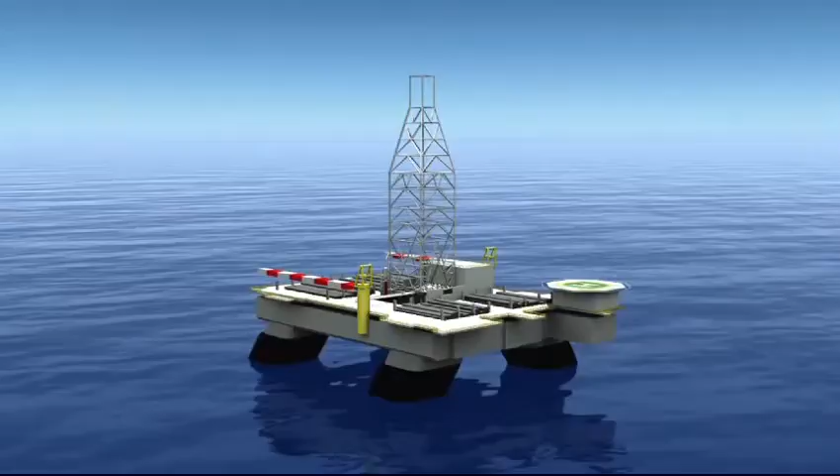This video summarizes the findings and analysis of this investigation team. As I review these, it's important to keep in mind the goals of the investigation. Our team was assembled immediately after April 20th in order to identify the critical factors underlying the accident.

Our mandate was to determine what happened so that BP could take whatever steps necessary to prevent a similar accident from ever happening again. Our purpose was not to apportion blame or liability, but rather to learn, recommend areas for improvement, and share our lessons with others.

While I believe we had sufficient evidence to reach the findings summarized here, our work was limited by a lack of direct access to some witnesses and to certain physical evidence. I will be presenting our findings factually, but it's important to note that our purpose was not to create a record that would serve as the definitive or final word on what happened.

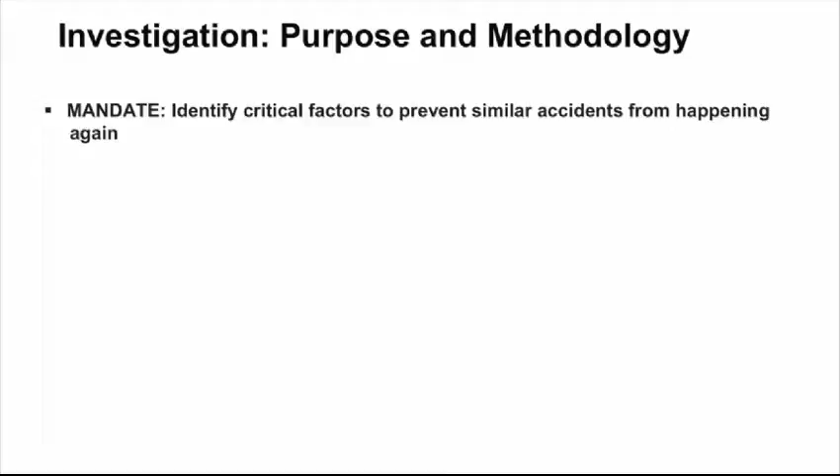The investigation team consisted of more than 50 internal and external engineering specialists with expertise in various aspects of deepwater drilling and exploration. We worked over a 4-month period examining all available evidence.

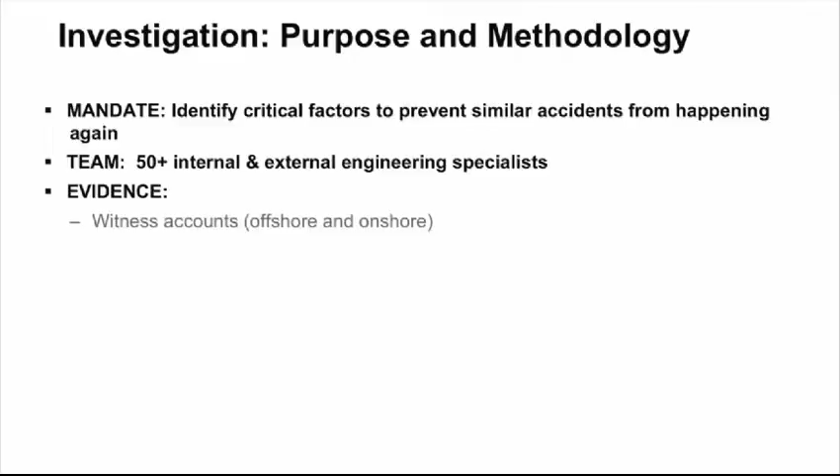This visual portrayal of our key findings is best viewed in the context of the report, which describes more fully the basis for findings. The findings were based on witness accounts, analysis and modeling, as well as engineering drawings, real-time data from the Deepwater Horizon, physical evidence, and testimony gathered from governmental inquiries.

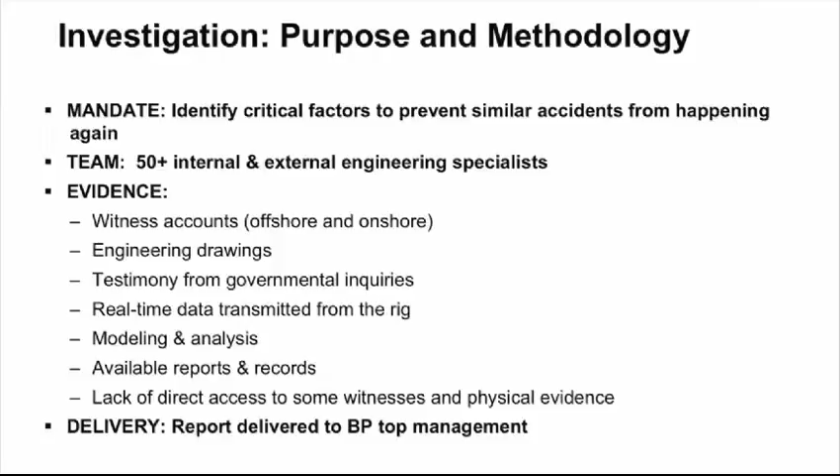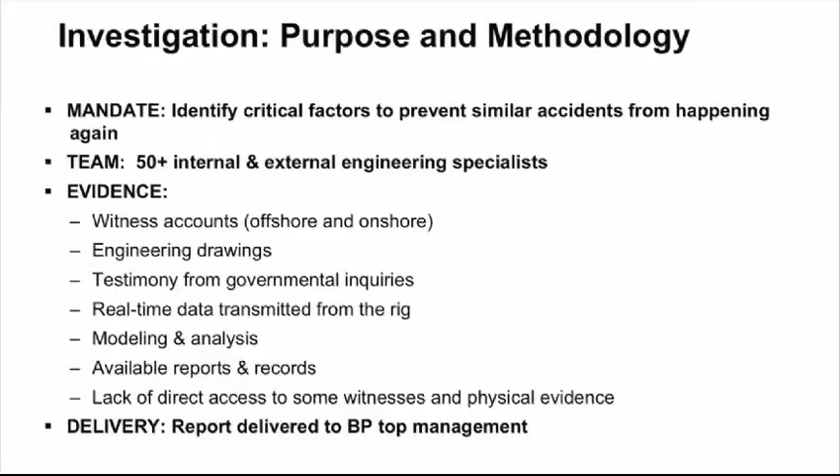The team's report was delivered to the board and BP's top management. They are sharing it publicly in order to keep the public informed, to assist with the government's various investigations, and to ensure that BP and the industry can learn from the accident and take appropriate actions going forward.

To determine what led to the tragedy, it's important to first understand the events that occurred aboard the Deepwater Horizon leading up to the accident. This short animation depicts the best understanding the team was able to reach about the chronology of key events as we understand them today. This is an animated reconstruction of the tragic accident aboard the Deepwater Horizon on April 20th, 2010. This narrative has been developed to illustrate what we determined were the key events related to the accident. The animation is representative and for illustrative purposes only, and has not been drawn to scale.

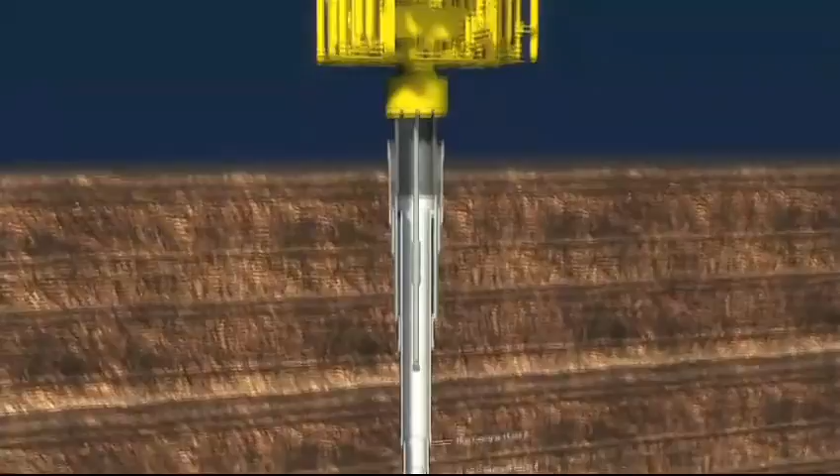The Deepwater Horizon was a dynamically positioned drilling vessel whose construction was finished in 2001. It was designed to drill in water depths up to 10,000 feet. The vessel arrived on the Macondo location on January 31st, 2010, to finish the exploratory well that had been started earlier by its sister vessel.

The riser and the BOP were installed successfully. 4 casing strings were installed over a 2.5-month period. Our narrative begins on April 9th, 2010. The final hole section of the well was drilled to a total depth of 18,360 feet. The long string production casing was installed.

During the afternoon of April 19th, the cement job started. Cement is used as a barrier to seal the wellbore from the reservoir sand. Nitrified foam cement was pumped into the annulus and non-foam cement was pumped into the shoe track. At this point, the pump pressure was bled off and it appeared that the check valves in the float collar were holding. It's now the morning of April 20th.

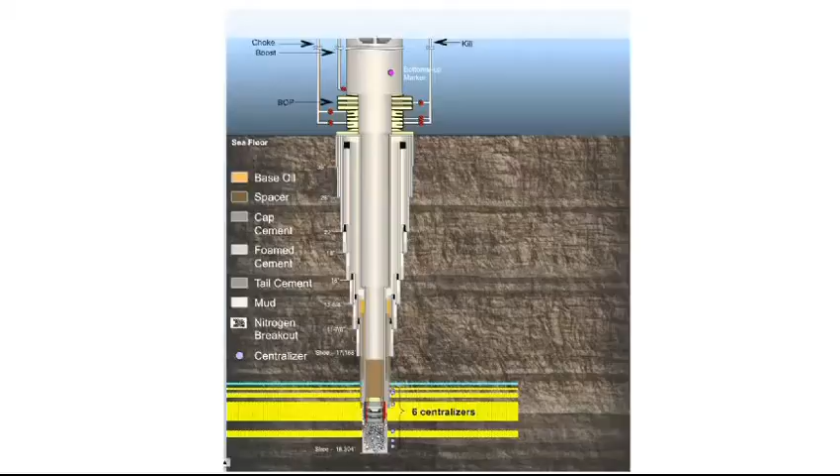The wellhead seal assembly was installed and tested. A positive pressure test, the first integrity test of the well, was conducted by closing the blind shear rams and applying 2,700 psi of pressure. The test confirmed integrity of the blind shear rams, the seal assembly, casing, and top wiper plug. The shoe track, which also plays a key role in isolating hydrocarbons, was not tested because of the presence of the top wiper plug. It's now early afternoon.

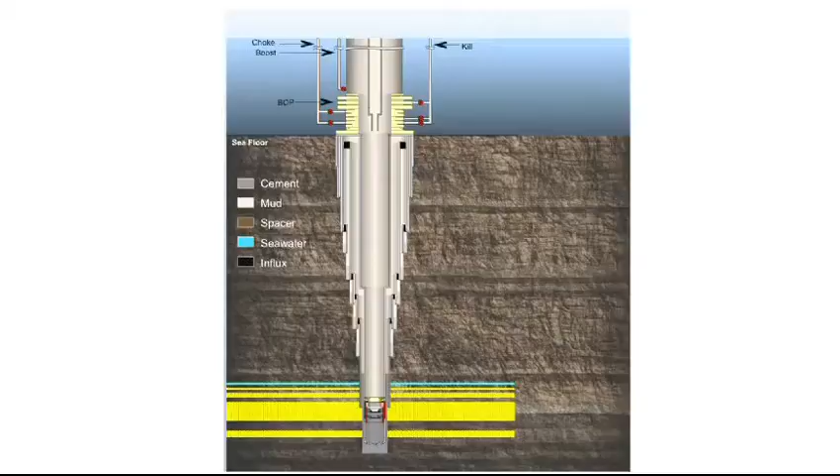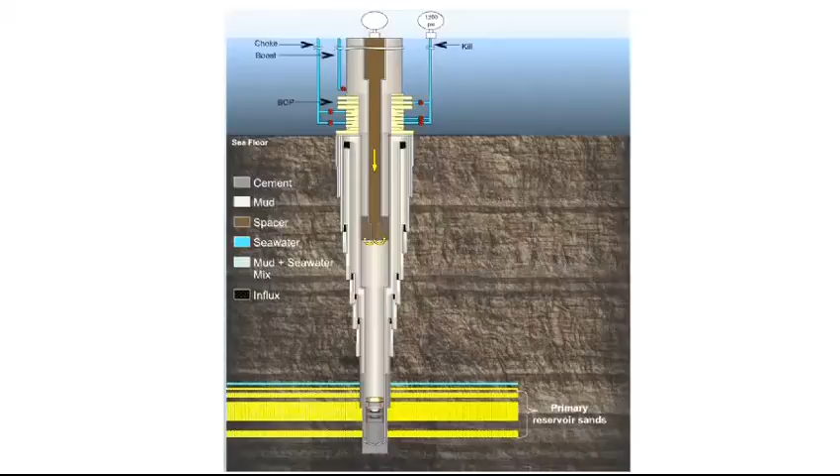The drill pipe was run to 8,367 feet in preparation for the negative test, which was the second test of the well's integrity. The test's purpose was to place the well in a controlled, underbalanced state to test all mechanical barriers. It was conducted by displacing some of the mud in the well with a spacer followed by seawater. After displacement, the upper annular preventer was closed. An attempt to bleed the system down to 0 psi was made, but fluid in the riser was leaking past the annular preventer.

It's now 1708. The hydraulic closing pressure for the annular preventer was increased to 1900 psi in order to create a tighter seal against the drill pipe. The riser was filled with an estimated 50 barrels of mud to replace the volume that had leaked past the annular. At 1727, the drill pipe valve was opened and the pressure reduced to 0 by bleeding off 15 to 23 barrels of seawater.

It's now 1735. The well site leader advised the rig crew that the negative test procedure needed to be conducted on the kill line to meet permit requirements. The drill pipe valve was closed and the testing reconfigured for flow to be monitored on the kill line. At 1752, the kill line valve was opened. Based on eyewitness accounts, somewhere between 3 and 15 barrels of seawater were bled off. The kill line valve was closed and the drill pipe pressure gradually increased.

It's now 1842. Seawater was pumped into the kill line to confirm that it was full. The kill line was routed to the mini trip tank, and less than 1 barrel was bled from the kill line. The flow stopped. The kill line was monitored for 30 minutes and showed no flow, but the drill pipe pressure remained at 1400 psi. A discussion about the source of the 1400 psi took place. It was explained as a phenomenon called the bladder effect. The test was deemed successful.

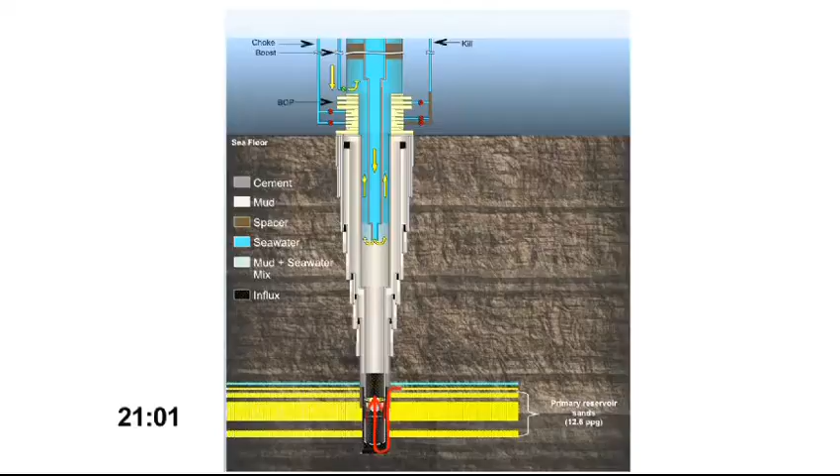It's now 2101. The crew was emptying the trip tank, which likely masked any flow indications on the flow meter. At this point, with constant pump rate, pressure should have declined as the heavier mud was being replaced with lighter seawater. Instead, drill pipe pressure increased by 100 psi, indicating a problem with the well. Analysis of real-time data shows that a 39-barrel gain was taken by 2108.

It was then time for the sheen test on the spacer, which is done in order to check that there is no free oil in the fluid that will be discharged to the sea. The pumps were shut down when the spacer reached the surface. A sheen test was performed, and the spacer was determined to be suitable for discharging overboard. The drill pipe pressure increased by 246 psi in 5.5 minutes while the pumps were off. The fluid returned from the riser was routed to the overboard dump line. During this period, our modeling suggests that the well was flowing at an estimated 9 barrels per minute.

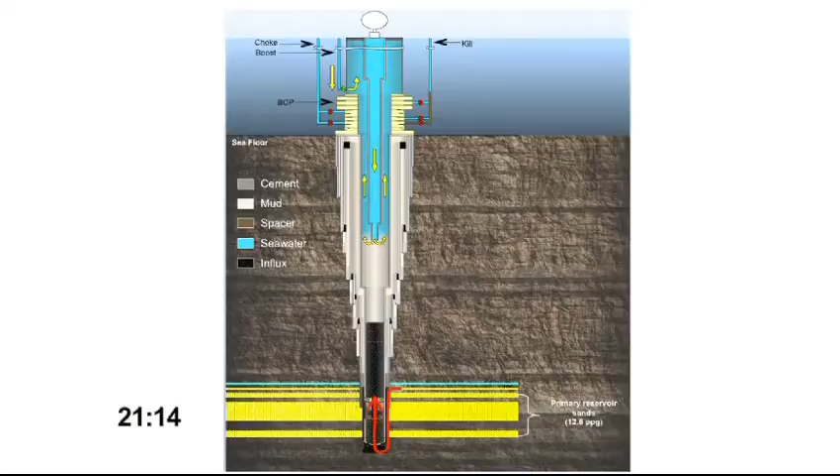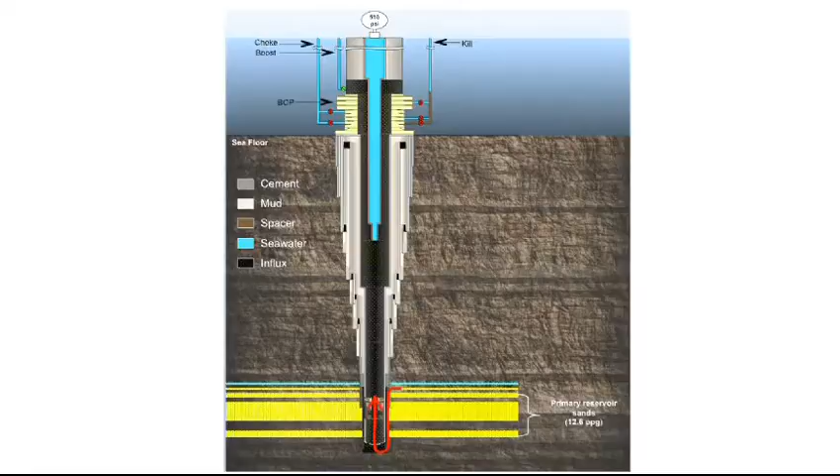Displacement of the mud with seawater resumed at 2114. It's now 2131. All mud pumps were shut down. An estimated 300-barrel gain has been taken. Over the next 5 minutes, the drill pipe pressure increased by 556 psi. Rig personnel discussed the differential pressure on the drill pipe. In the next 2 minutes, it appears an attempt was made to bleed the drill pipe, possibly to investigate the differential pressure.

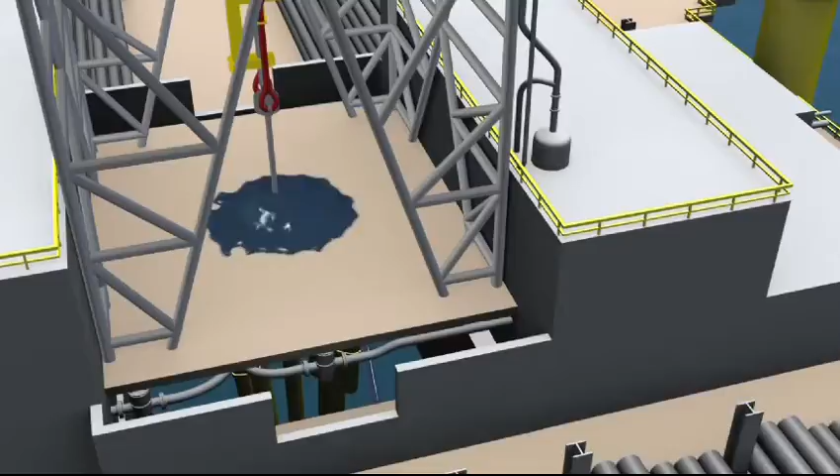Over the next 20 minutes, a series of critical well control events occurred, ending in the order to abandon ship. It's now 2140. Mud overflowed onto the rig floor. A minute later, the mud shot up through the derrick.

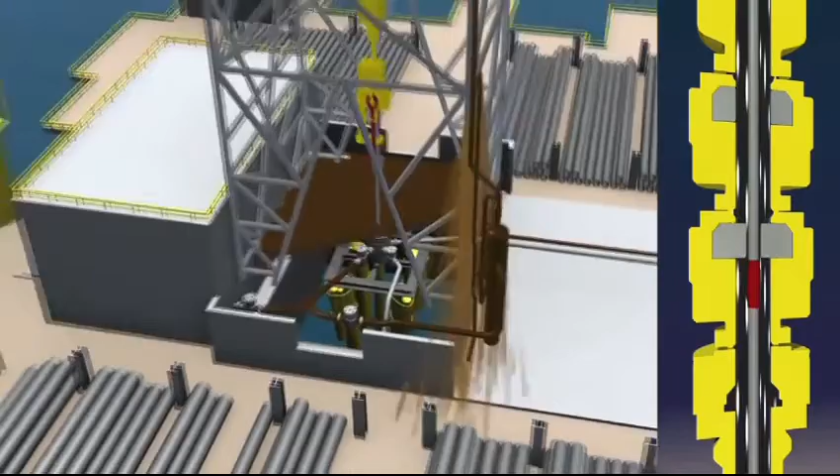The diverter was closed and flow was diverted to the mud gas separator. At about the same time, the rig crew appeared to close an annular preventer and drill pipe pressure increased steadily from 338 psi to 1200 psi over a 5-minute period. Mud and hydrocarbons discharged onto the rig and overboard. Activation of the annular preventer appears to have failed to seal the annulus.

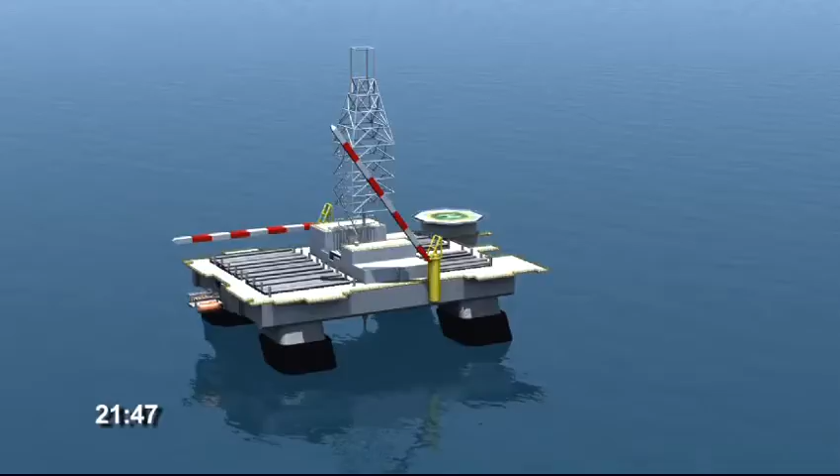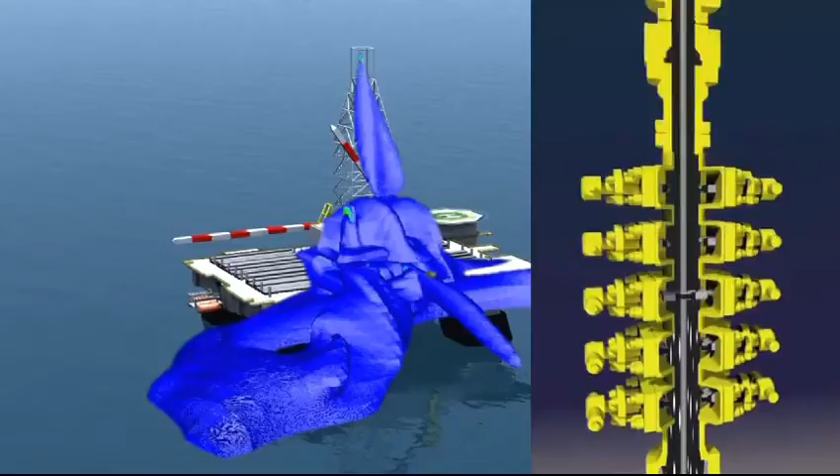It's now 21:47. The first gas alarm sounded. A cloud of gas spread, setting off other gas alarms. There was a roaring noise and the vessel vibrated. The drill pipe pressure rapidly increased to 5,730 psi, which is thought to be the result of the BOP sealing around the drill pipe, likely after activation of the variable bore rams or the annular preventer fully sealing.

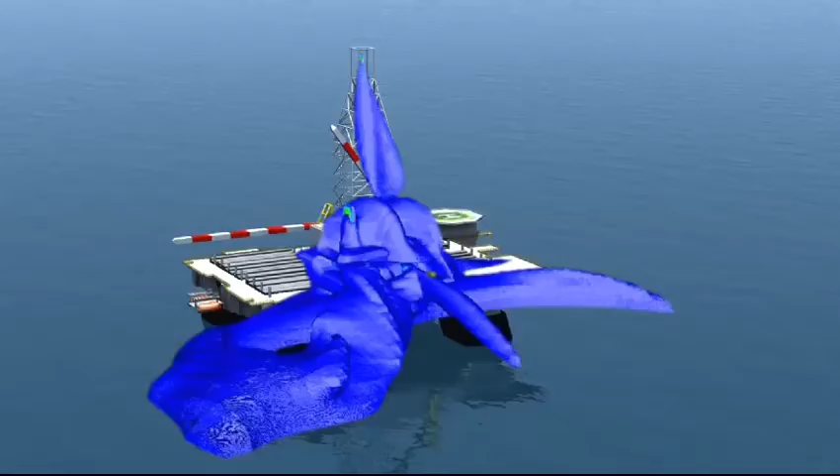1 minute later, the combustible gas cloud reached the aft starboard quadrant of the main deck and probably entered the air intakes for the engine room. Gas also dispersed under the deck and into the engine room enclosures. The main power generation engines went into overspeed.

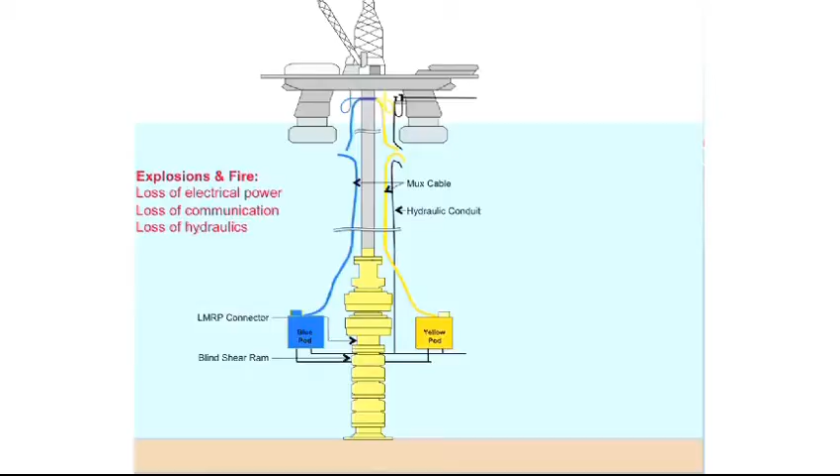Within another minute, electrical power was lost and there were 2 explosions. The first occurred at about the same time as the power loss. The second occurred an estimated 10 seconds later. The second explosion appears to have taken place under the main deck in the aft starboard quadrant of the rig.

The associated blast pressure wave traveled forward and caused extensive damage to the starboard side, potentially damaging the MUX cables, which allow the vessel to communicate with the BOP. The hydraulic line which powers the BOP may also have been damaged.

The fire and explosions may also have caused damage to the surface drill pipe equipment, resulting in hydrocarbons flowing to the surface through the drill pipe. The valve on the drill pipe was left open, exposing surface components to high shut-in pressure.

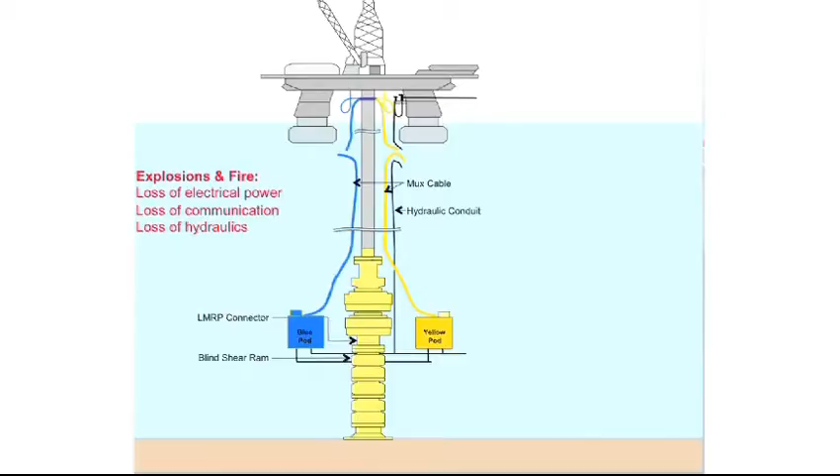While the BOP had closed around the drill pipe, it did not seal the well, and the subsequent loss of power may have resulted in the rig drifting off station. The drifting rig may have broken the BOP seal around the drill pipe and allowed hydrocarbons to continue to flow up the riser. One or a combination of these events ultimately allowed the fire to be continually fed.

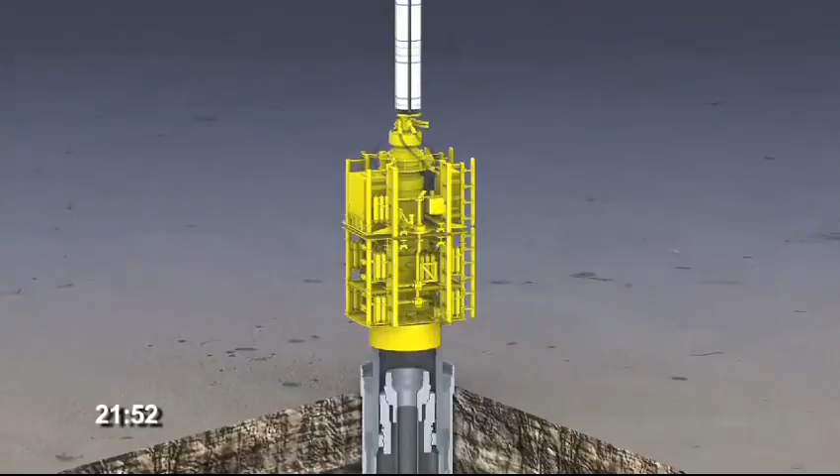It's now 21:52. Over the next 5 minutes, personnel attempted to shut in the well and disconnect the lower marine riser package from the BOP stack. The emergency disconnect sequence for the BOP was activated from the bridge.

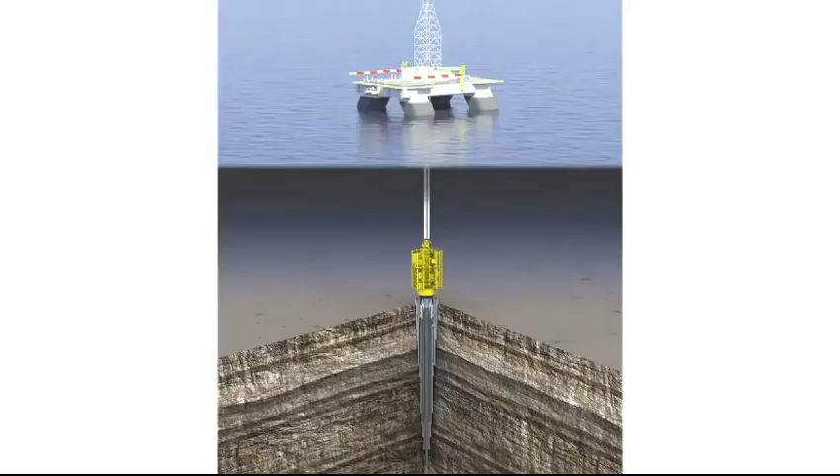While lights changed on the control panel, no flow was observed on the flow meters. It appears that the emergency disconnect system did not function. The lower marine riser package failed to unlatch from the BOP, and the BOP did not seal the well. With the Deepwater Horizon unable to disconnect from the well, the order to abandon ship was given at 2200 hours.

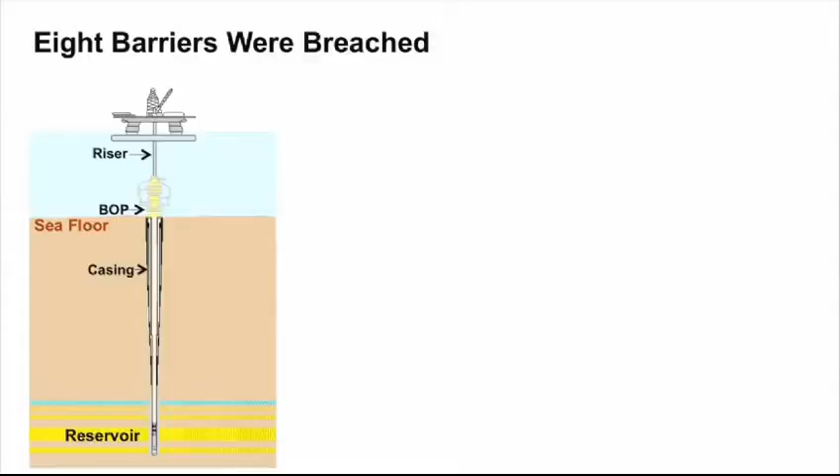This animated chronology has shown what we believe happened. Now we'll turn to an analysis identifying the contributing factors. As you'll see, we concluded that there was no single action or inaction that caused the accident. Instead, we found that there were 8 interrelated and contributing factors that led to this tragedy.

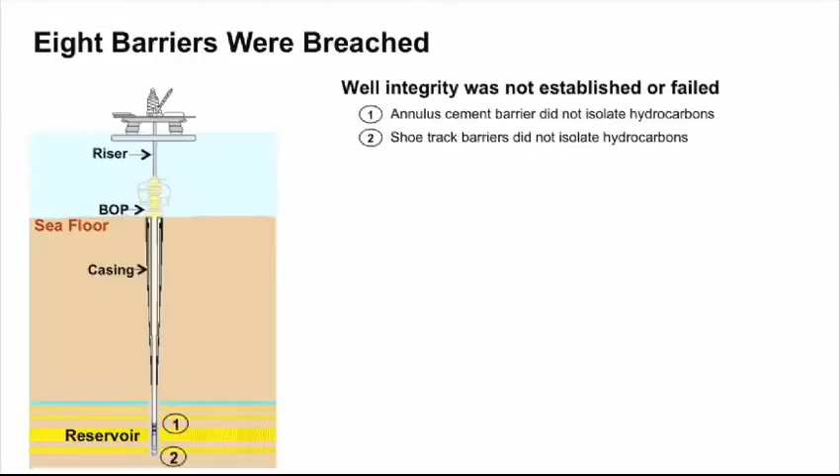The first 2 findings of the investigation relate to hydrocarbons entering the well. We believe that the evidence shows that both the annulus cement barrier and the shoe track barriers did not isolate the hydrocarbons, allowing them to flow up the wellbore.

The next 3 findings stem from evidence that the rig crew did not observe or recognize that hydrocarbons had entered the well before appropriate steps could be taken to contain them. The negative pressure test conducted in order to confirm well integrity was incorrectly accepted.

An influx of hydrocarbons was not recognized until it was too late to prevent the hydrocarbons from reaching the surface because they had already entered the riser. And well control response actions failed to seal and regain control of the well.

Our 6th and 7th findings relate to evidence that hydrocarbons came up through the riser and were dispersed across the vessel, creating the conditions for them to ignite.

We found that the well flow was diverted to the rig's mud gas separator, causing gas to be vented onto the vessel rather than being diverted overboard. Then, the vessel's fire and gas system did not prevent hydrocarbon ignition.

Our 8th and final finding was drawn from evidence relating to the blowout preventer. With the loss of well control and subsequent explosions and fires, the BOP did not seal the well. Each of these findings is explained in greater detail throughout the remainder of this presentation.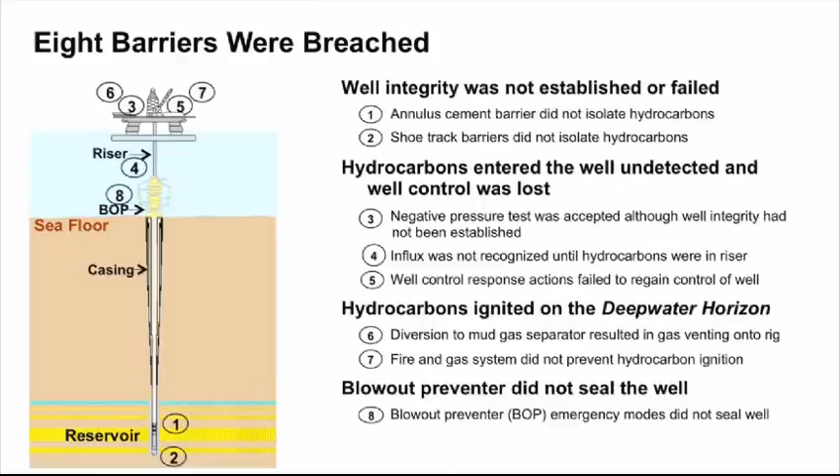Our first key finding relates to the cement job. BP relied on the expertise of Halliburton, the cementing services provider, to recommend a cement slurry appropriate for this well. The BP team was responsible for assuring Halliburton's work and accepting its proposal.

It was clear from the event that the cement did not isolate the hydrocarbons. The challenge facing the investigation team was to determine what happened without access to actual samples of the cement slurry used in the Macondo well. Therefore, we had an independent laboratory analyze the slurry design and also create and test samples based on that design.

Through our investigation of the cement job, we noted the following critical items. First, the high percentage of nitrogen in the foam cement made it difficult to create a stable foam slurry. Second, there were no fluid loss additives used in the entire cement slurry. Third, a relatively small amount of cement was pumped in relation to the displacement volume, increasing the likelihood of cement contamination. And fourth, Halliburton did not conduct comprehensive lab tests that could have identified potential problems with the cement.

The independent laboratory constructed representative cement samples based on the slurry design and demonstrated that cement stability could not be achieved. Therefore, we've concluded that the foam slurry likely experienced nitrogen breakout, resulting in nitrogen migration, slurry contamination, and incorrect cement density. Our investigation of the cement job also included an analysis of BP's decision to use 6 centralizers and a long string production casing in the well.

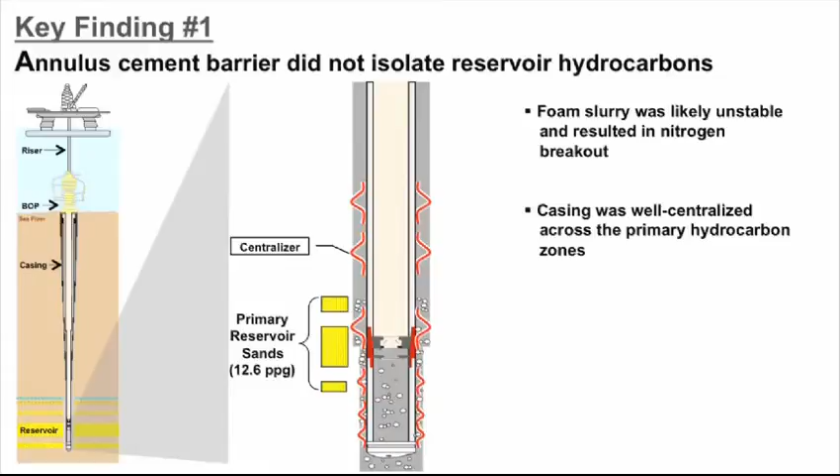The investigation team's next task was to determine the actual point of entry for hydrocarbons into the well. We examined and analyzed every plausible entry point. As a result, our second key finding is that the initial hydrocarbon entry occurred at the shoe track and that its mechanical barriers therefore did not isolate the hydrocarbons. Our conclusion is based in part on hydrostatic pressure calculations, well flow modeling, and an analysis of data recorded during the successful static kill of the Macondo well.

The shoe track has 2 types of mechanical barriers: the cement in the shoe track and the double check valves in the float collar. The investigation team believes that the shoe track cement failed to act as a barrier. The team has not established whether this failure was attributable to the design of the cement, contamination of the cement by mud in the wellbore, commingling of the cement with nitrogen due to nitrogen breakout from the foam cement, swapping of the shoe track cement with the mud in the bottom of the well, or some combination of these factors.

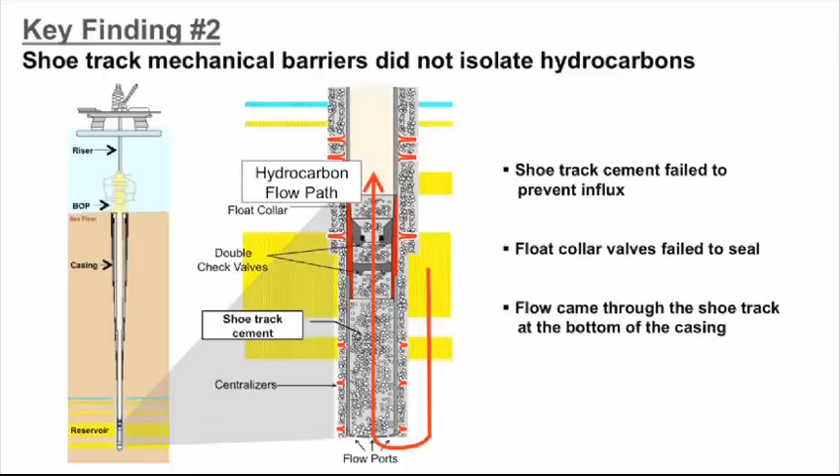Hydrocarbons were able to bypass the float collar check valves because they were damaged, they never properly converted, or they simply failed to seal. The evidence shows that the flow came up through the shoe track at the bottom of the production casing. Therefore, the decision to use 6 centralizers likely did not contribute to the outcome.

The third key finding is that the negative pressure test was accepted, even though well integrity had not been established. The negative test was conducted to confirm the integrity of the annulus cement, shoe track, casing, and wellhead seal assembly. Looking back, the investigation team believes there were several issues associated with this negative test.

First, at the start of the test, the annular preventer allowed approximately 50 barrels of spacer to pass into the BOP. This may have inhibited the pressure readings on the kill line. Second, the bleed-off volumes we examined were in excess of what should have been expected, indicating communication with the reservoir through failed barriers.

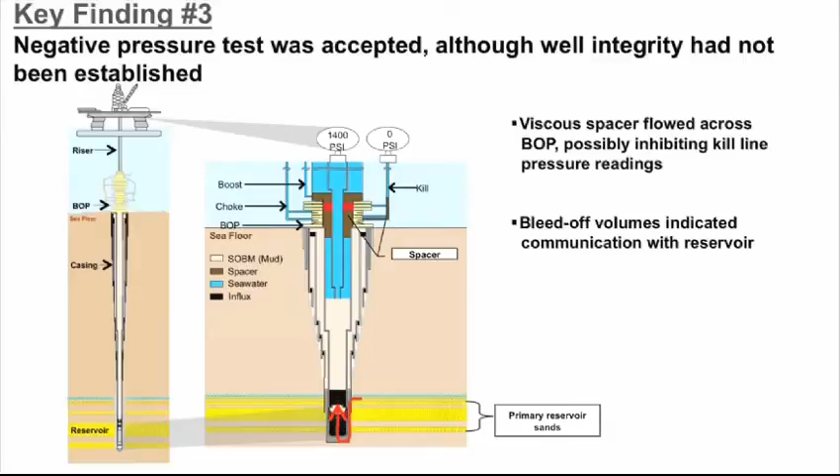And third, rig personnel found that drill pipe pressure had increased to 1,400 psi with no flow on the kill line. The investigation team believes this reading should have resulted in further inquiry into the well's integrity. Instead, the abnormal pressure was attributed to a phenomenon called the bladder effect.

Ultimately, the negative test was incorrectly deemed a success by BP and Transocean rig personnel. A more detailed procedure would have helped BP and Transocean personnel to implement and interpret the negative test.

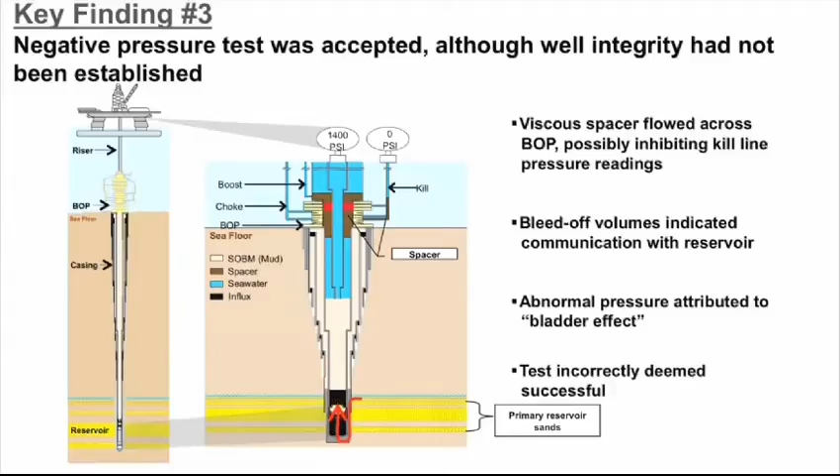The investigation's fourth key finding is that the influx of hydrocarbons into the well was not recognized until it had entered the riser. Well control principles rely on early influx detection and effective response. The investigation team examined real-time data from the rig, conducted dynamic flow modeling, and reviewed witness accounts in order to reconstruct the key indications of flow that we believe were not observed or recognized. It appears that there were a number of indicators of hydrocarbon influx that went unobserved or unrecognized.

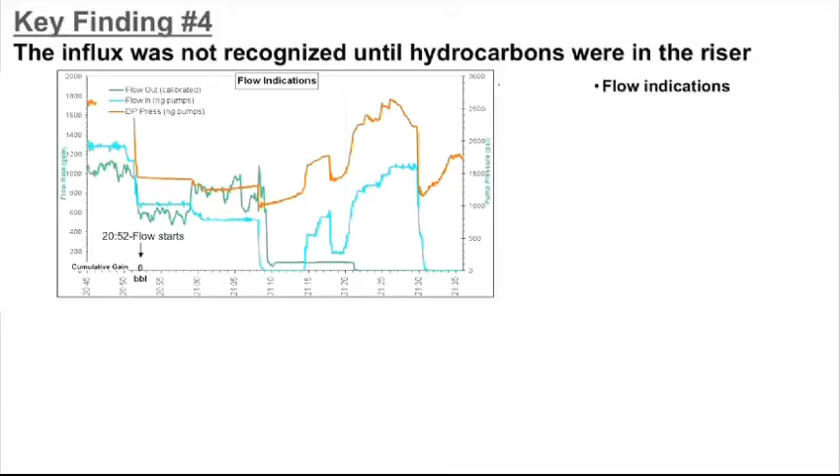First, from 2058 to 2108, the drill pipe pressure should have decreased. Instead, drill pipe pressure increased by 100 psi at a constant pump rate starting at 2101. By 2108, a 39-barrel gain had been taken.

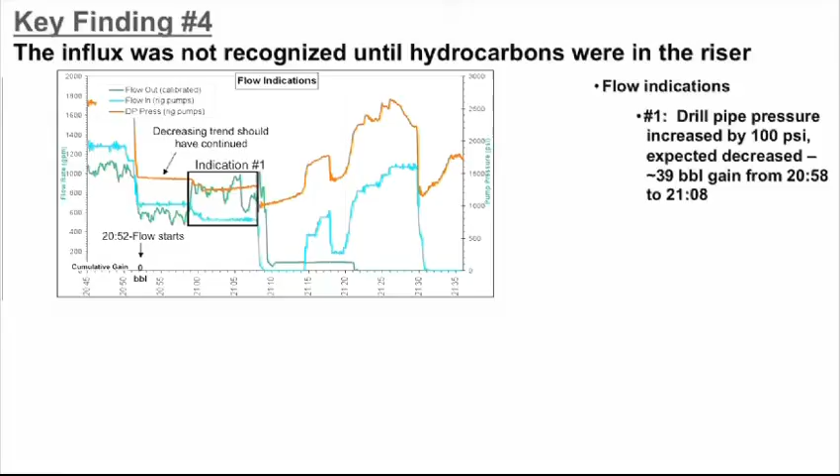Second, from 2108 to 2114, the drill pipe pressure increased by 246 psi with the pumps off. Pressure should not have changed during this period.

And third, by 2131, an estimated 300-barrel gain had been taken. Over the next 5 minutes, the drill pipe pressure increased by 556 psi, again with the pumps off. These indicators should have been observable, but it appears the first well control actions were not taken until about 2141, by which time an estimated 1,000-barrel gain had been taken.

The investigation team has not reached a conclusion as to why these indicators were not observed or recognized. We note, however, that simultaneous operations were occurring on board the vessel at this time, including mud pit cleaning and mud pit transfers, which may have masked the indications of a hydrocarbon influx.

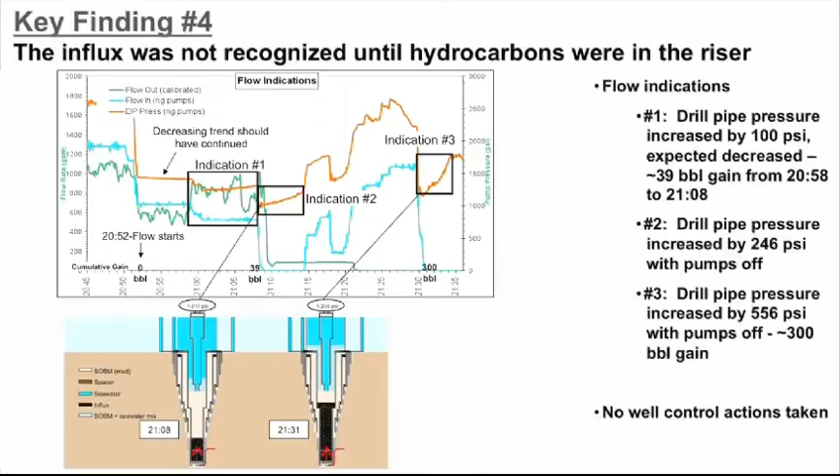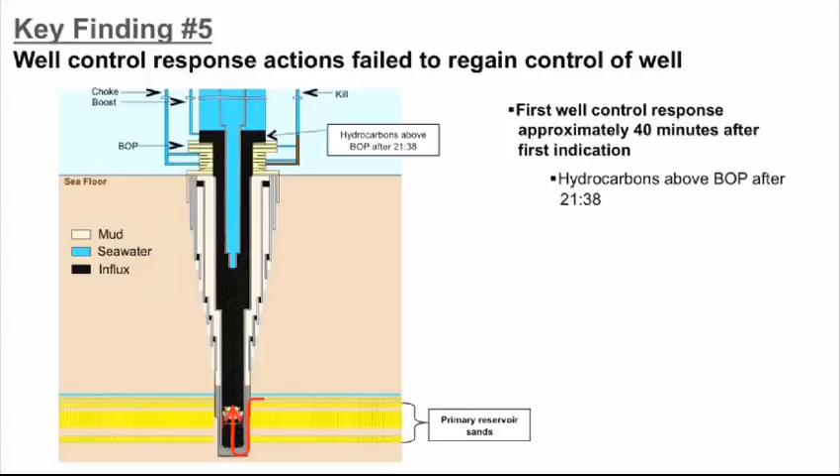The fifth key finding is that well control response actions did not regain control of the well. Upon recognizing an influx, the well must be shut in, and if necessary, hydrocarbons diverted safely away from the vessel. The investigation team believes that the response on April 20th was not typical of a rig crew that was aware a significant well control event was occurring. For example, in retrospect, there was about a 40-minute gap between the first indication of hydrocarbon influx and the first well control response.

Roughly 8 minutes later, the first explosion occurred. When action was taken, the diverter was closed and the flow was routed to the mud gas separator. Also, at that point in time, it appears that an annular preventer was activated, but apparently did not immediately seal. The BOP sealed about 6 minutes later. The investigation team believes that the time for effective emergency response was significantly shortened because initial indications that hydrocarbon had entered the well went unobserved or unrecognized.

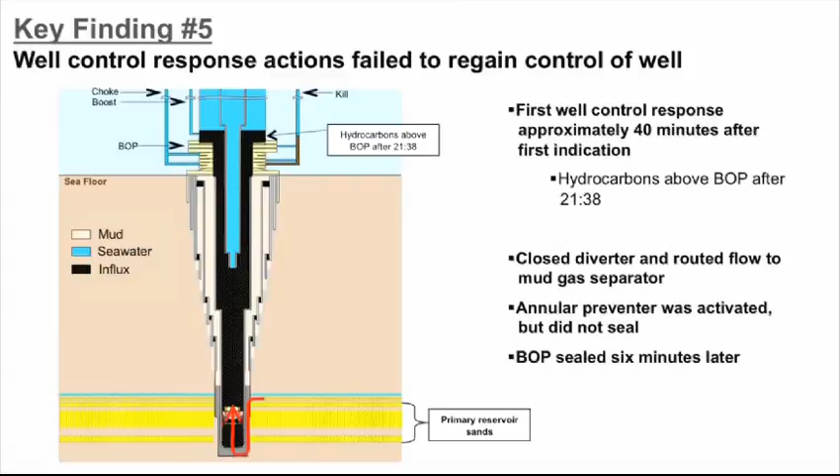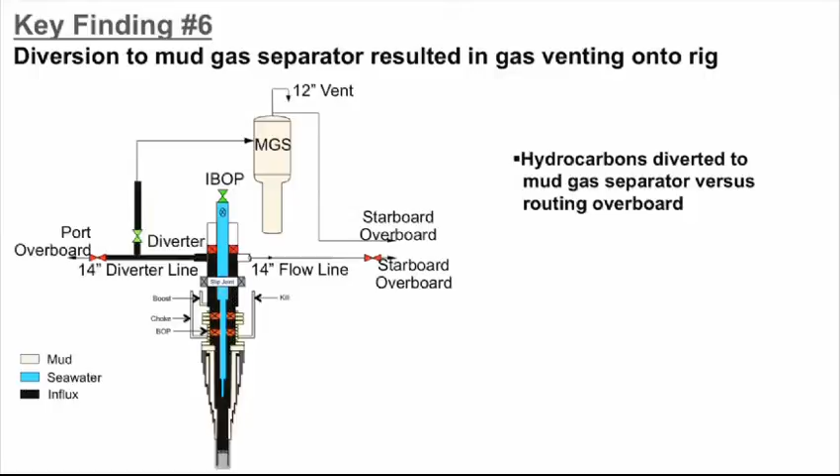The sixth key finding is that the diversion of hydrocarbons to the mud gas separator resulted in gas venting onto the rig. In a well control event, the riser diverter can be closed and the fluids directed to either the overboard diverter lines or the mud gas separator. Based on testimony and interviews and an analysis of photographs and well flow data, we believe the flow was diverted to the mud gas separator. The mud gas separator is designed to remove small amounts of entrained gas, but not the significant volumes experienced here. Large volumes would generally be expected to be sent overboard via the 14-inch diverter line. As gas dispersed across the vessel, potential ignition sources were enveloped in a flammable vapor cloud.

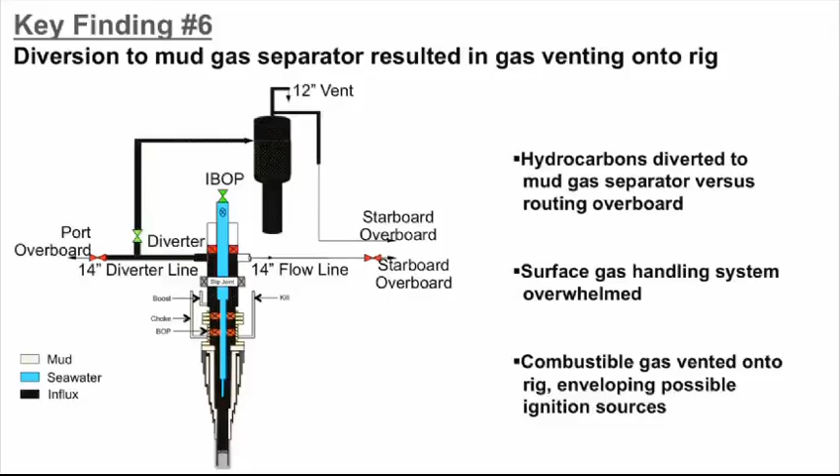The seventh key finding is that the fire and gas system on the Deepwater Horizon did not prevent hydrocarbon ignition. Gas dispersion modeling conducted by the investigation team shows that rapid spread of gas across the vessel covered the main deck and moon pool areas, overwhelming the secondary protective devices. The investigation team believes that the gas likely entered the engine rooms through the main deck air intakes, resulting in engines going into overspeed. These engines were one potential source of ignition.

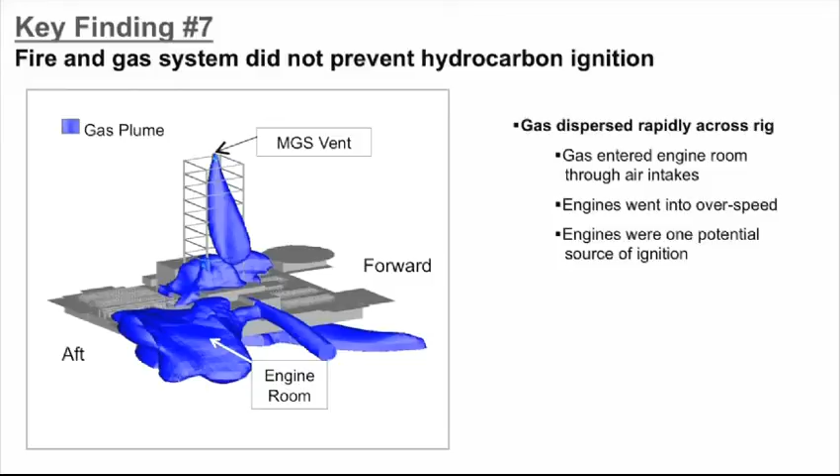The eighth and final key finding is that the blowout preventer did not seal the well. The investigation focused on the BOP's emergency systems and why they failed to seal the well after the initial explosion. The investigation team identified issues that we believe interfered with the operation of the BOP. First, the initial explosions and fire damaged the control cables, called MUX cables, and the hydraulic lines. The MUX cables are critical to BOP operation because they provide electronic communication and electrical power to the BOP control pods. This is likely why the emergency disconnect system failed to activate the blind shear ram when it was triggered by personnel on the bridge of the Deepwater Horizon.

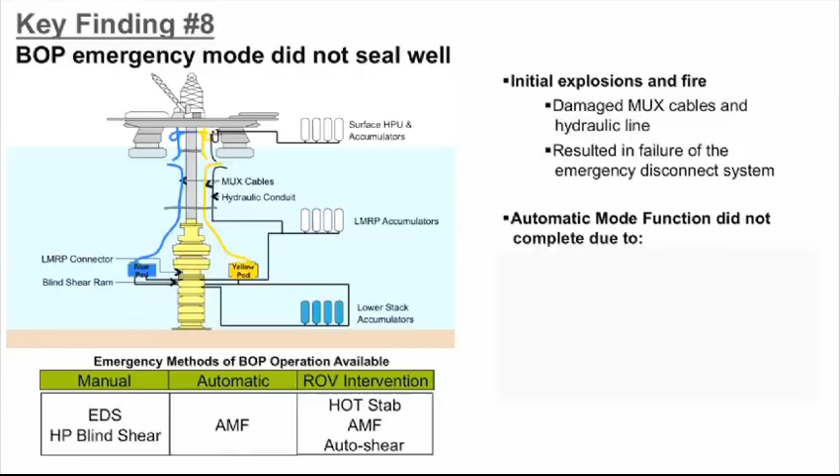Second, we believe, based on testing done at the direction of Transocean, after both control pods had been retrieved, that the automatic mode function, or AMF sequence, did not complete. The AMF should have activated automatically, without crew intervention, when the MUX cables and hydraulic line were damaged. At least one operational control pod was required to activate the AMF. However, based on testing, there was a defective solenoid valve in one control pod and insufficient charge on the batteries in the other control pod.

We believe that the ROV intervention to simulate auto shear conditions likely activated the blind shear rams, but they failed to seal the well and hydrocarbons continued to flow. The investigation team has not determined the reasons for the failure of the blind shear rams to seal. Presence of non-shearable pipe across the blind shear ram, insufficient hydraulic power subsea, and prevailing flow conditions are among the potential causes of failure. The investigation team also found indications of potential weaknesses in the testing regime and maintenance management system for the BOP. The BOP is a complex device, and more may be known when it is fully examined.

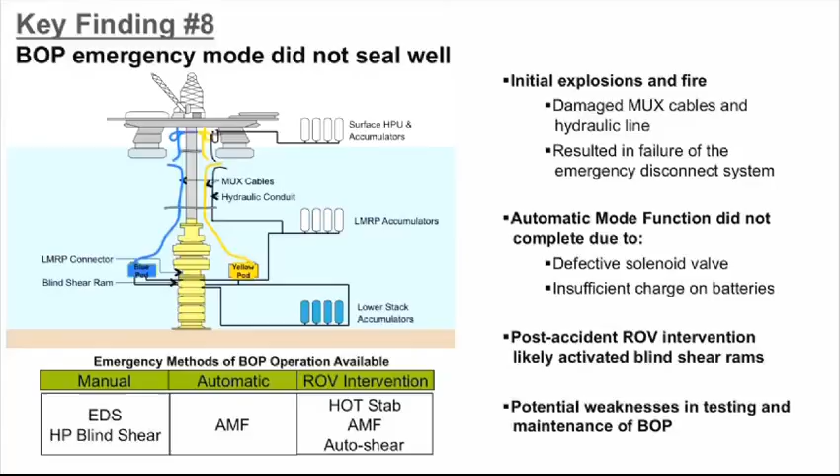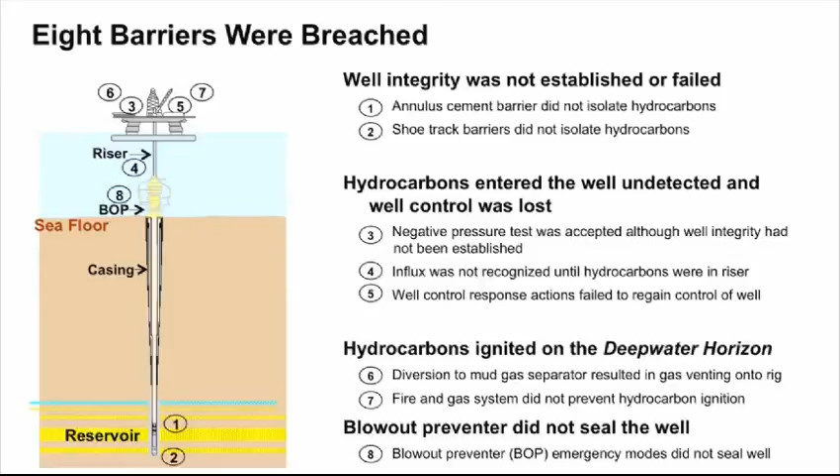In summary, as I noted at the outset, the investigation team concluded that there was no single action or inaction that caused the Deepwater Horizon accident. 8 safety barriers were breached. The accident was the culmination of a complex and interlinked series of mechanical failures, human judgments, engineering design, operational implementation, and team communication. These involved a number of companies, including BP.

This presentation of the report's findings is intended as a high-level overview. The full report is available on BP's website. BP's senior management has accepted all of the team's recommendations, which address changes that should be made in drilling and well operations, as well as contractor and service provider oversight.

Finally, in the course of conducting the investigation, the team learned of many brave acts by people on the night of the accident. I would like to close by recognizing those individuals for the lives they undoubtedly saved and by extending our sympathies to the families of the 11 men who died that night and to the communities subsequently affected by the spill.